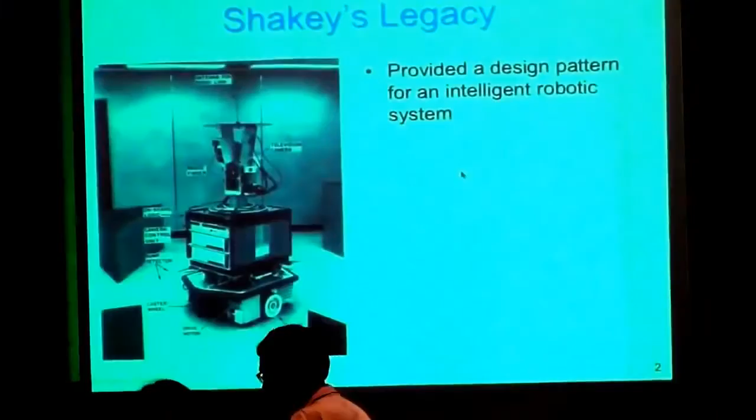In reflecting upon Shakey's legacy, I think the important point is that it provided a design pattern for an intelligent robotic system, a vertically integrated system of subcomponents all the way from motor controllers, sensors, low-level controls, up to the highest level STRIPS-based task reasoning, which was really impressive for the time. This led to a design pattern that has been used ubiquitously in robotics over the last half-century.

What really got me excited about robotics 25 years ago was the idea of search-based artificial intelligence. In 1989, I joined Stanford and started thinking about how we could build computer programs that could compete at the level of humans. Then in 1997, Deep Blue defeated Garry Kasparov. What was interesting to me was that the machines could do planning, reasoning about the consequences of actions. Deep Blue might examine 200 million chessboards per second. That wouldn't be the way a human would solve the problem, but it sure is effective.

So my thought was, how can we build computer programs that enable robots and computers to exploit the skills they're good at and maybe have humans fill in the gaps? A game is very discrete with no uncertainty, but if you think about planning in the real world, complexity suddenly rears up in terms of the models you're using. You have uncertainty both in sensing and in control.

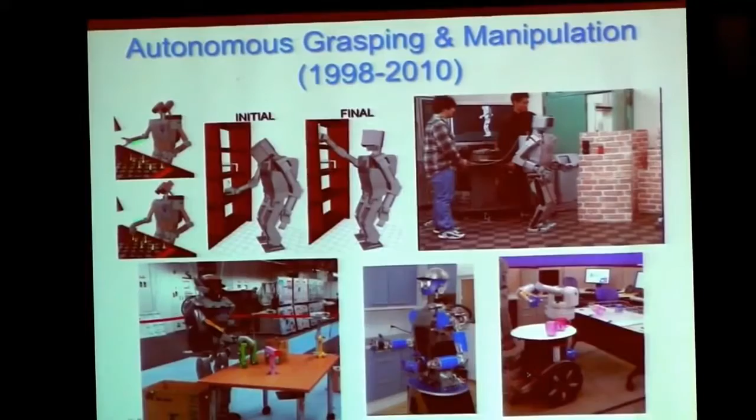I'm going to explain how the planning in the A-star search developed for Shakey influenced a lot of the research my group at CMU got involved with, and things I'm still interested in. I worked with my colleague Steve LaValle to develop a sampling-based planning algorithm called an RRT. The goal was to connect in a high-dimensional space very quickly and find a solution, even if it wasn't optimal, so you could make a planning system that was tractable for higher-dimensional systems.

I'm not sure why the movies are not playing. It's rather unfortunate. Let's see if I just do it this way. I wonder if it works.

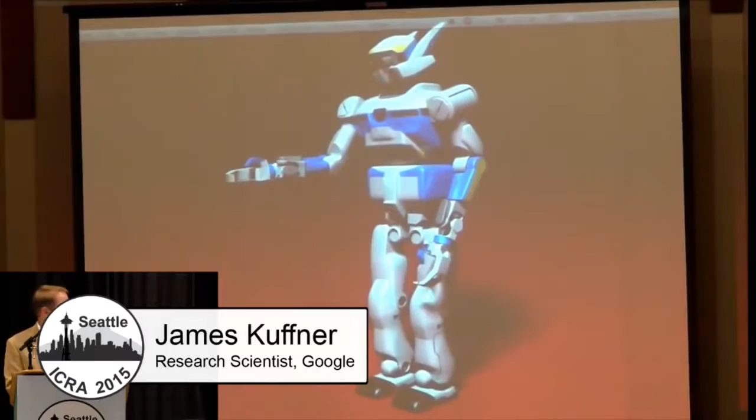Here we go. Okay, sorry.

So one of the trade-offs here was that we wanted to be able to make the common case fast and have a computation that was balanced between exploring a space and rapidly converging on a solution. So that led to this experiment in trying to implement this online on a robot for manipulation.

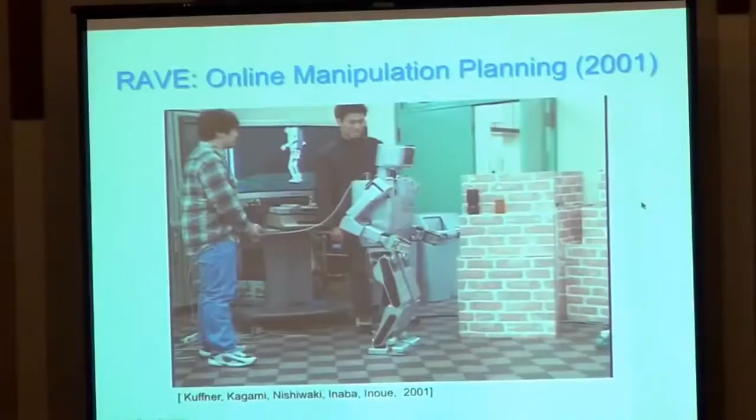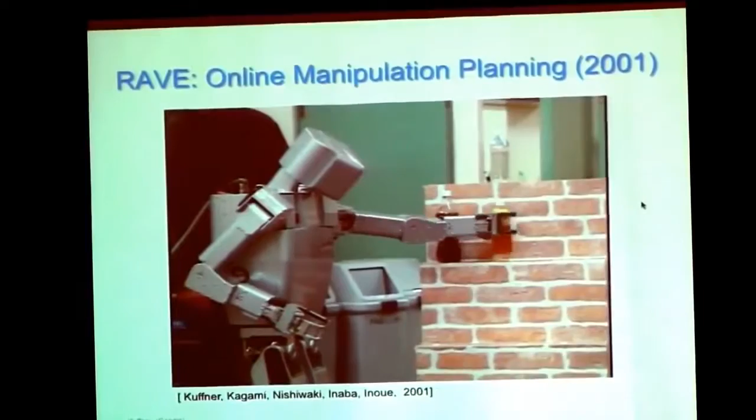So here we have a stereo vision camera in the head. We will compute a path in the 7-dimensional space of the arm to grasp the bottle. That's collision-free, so it computes the grasp, and then it's able to compute another path. And then you have a beverage delivery system that is very expensive.

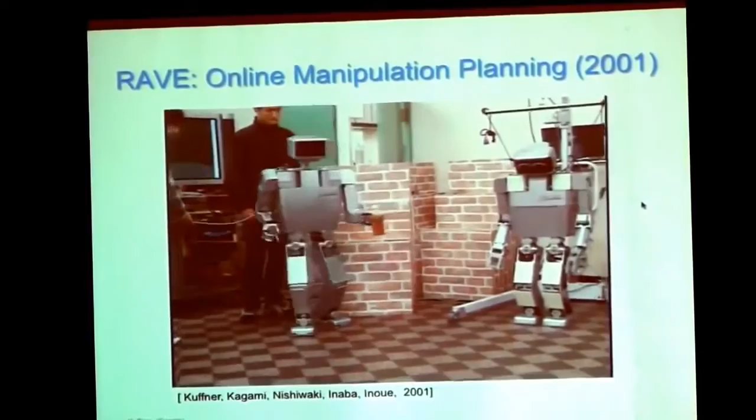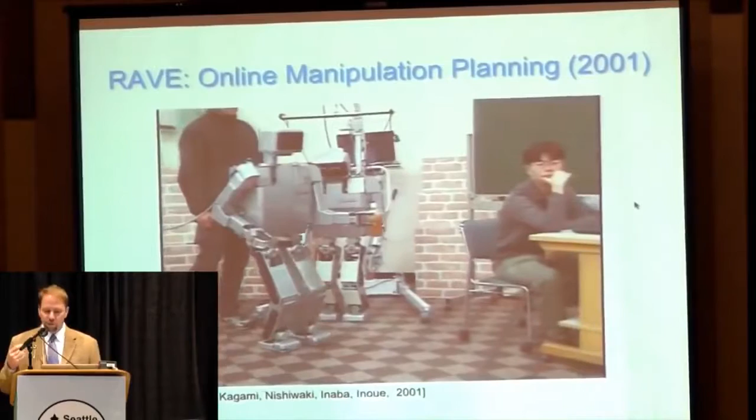Now, of course, this was mostly, in some sense, trying to prove a concept that we could build a system that was adaptive and dynamic, and I think that was in the spirit of Shakey. Shakey was able to not just perform pre-programmed tasks, but actually do dynamic tasks.

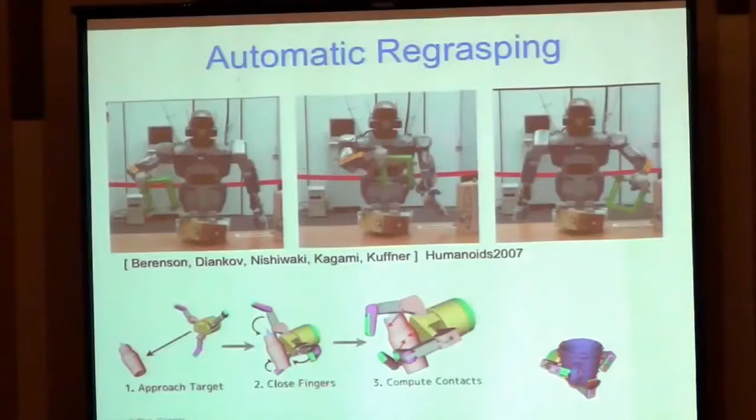So a lot of my students continued on this work, putting in constraints like regrasping, and one of the things that we looked at was how can you actually search in a space to find stable grasps. And this is where I think cloud computing can also help find solutions. You can build these simulations that can run in a distributed manner, and then once you've found stable solutions, you can remember them and then recall them for future use.

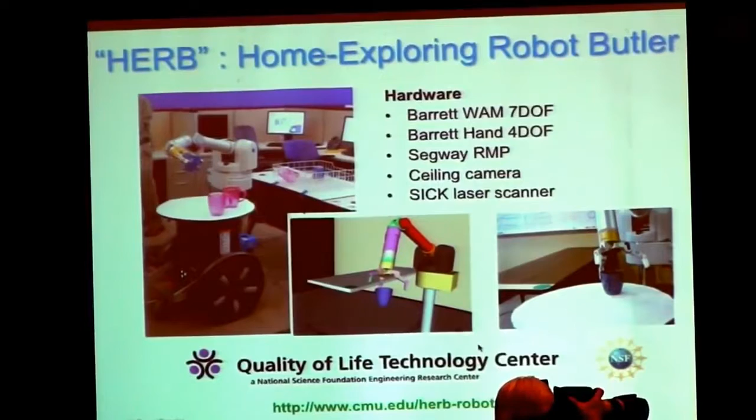So this became integrated, and I would say a Shakey descendant, which we built at Carnegie Mellon's Quality of Life Technology Center, which was called the Home Exploring Robot Butler. It was a WAM arm and a hand on top of a Segway base, and we used a laser scanner to navigate and also to sense obstacles.

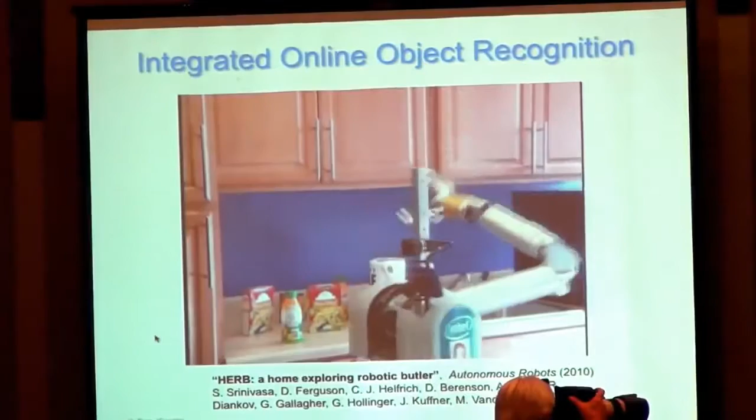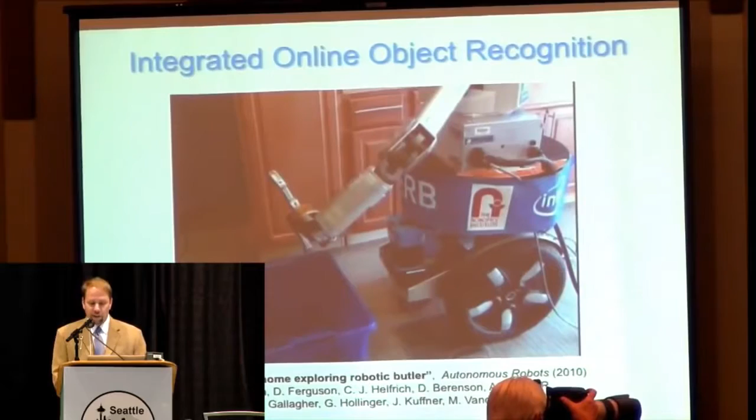We got it to the point where we could integrate a lot of different systems, including recognizing objects, computing a grasp, planning an arm motion path, and then verifying that the task has been completed.

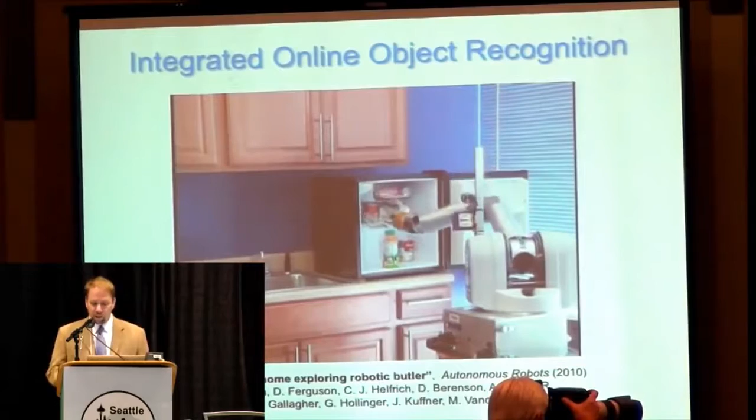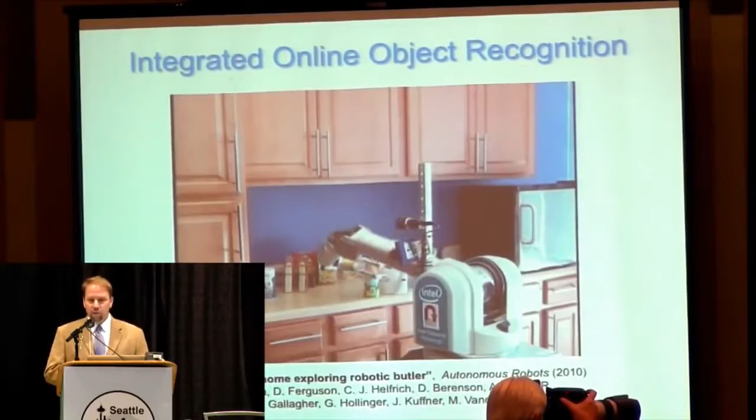And what inspired us was a lot of work that had been done in conferences like ICRA and Humanoids in putting together systems that will scale to many objects, systems that will scale to many situations, and not just have robots in factories playing back pre-programmed motions.

And one of my students, Dmitry Berenson, also looked at planning with constraints, so that way you could look at if you want to keep something vertical, or if you want to respect the fact that you have limited torque and you need to move a heavy weight, how can you do it in an advantageous way?

And my other student, Rosen, his PhD thesis, I think, built on a system that looks much like a lot of the subcomponents of Shakey, in trying to build a series of sub-goals that are generated and then integrated with perception and feedback and planning, and building a kind of robot knowledge base.

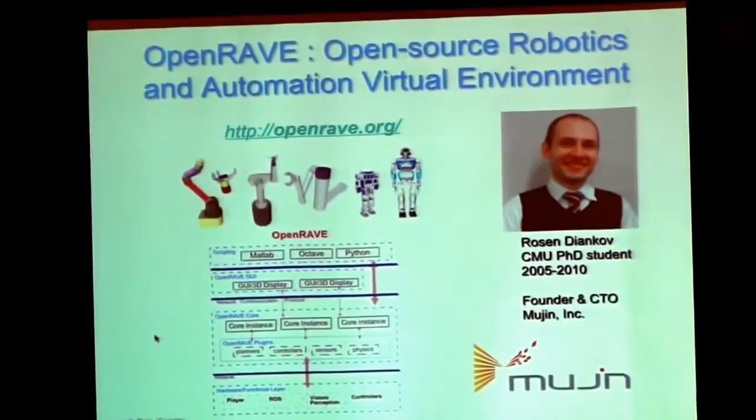By the way, each of these tasks are mostly open source as part of the Open-source Robotics and Automation Virtual Environment, which is a version of the software that I had built when I was a grad student and is now released to the open source community. And Rosen is here today. He founded a company around using this planning technology for automation called Mujin. You should check it out.

So one of the other things that we wanted to do was have manipulation, but we also wanted to have navigation. And searching for navigation in the Shakey world was building a map and then exploring discrete cells. But if you did that in a 2D grid, it would mean that your robot always had to circumvent obstacles. Whereas if you had a legged robot, you could actually step over or step on obstacles if you needed to.

And so the thinking was to try and figure out a search-based framework for doing navigation for legged robots, so we came up with this concept of footstep planning, and Joel Chestnutt, one of my first PhD students, who now works at Boston Dynamics, developed this technique.

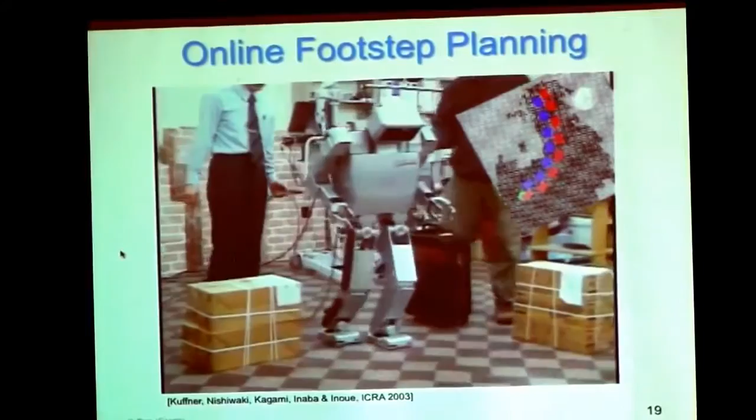And this is sort of one of the first videos that we built with our colleagues at the University of Tokyo, at Professor Inoue and Inaba's lab, where we had onboard stereo vision. We would build a map, we would plan a path towards the goal. In this case, it would detect the red ball, and then it would plan online a sequence of footsteps to navigate to the goal.

And this first version of the footstep planner could examine a few thousand footstep candidates in about 3 seconds. But very soon we were able to upgrade the computers, and the joke in motion planning is that you can republish your research 10 years later with the title Real Time. Just let Moore's Law do all the hard work.

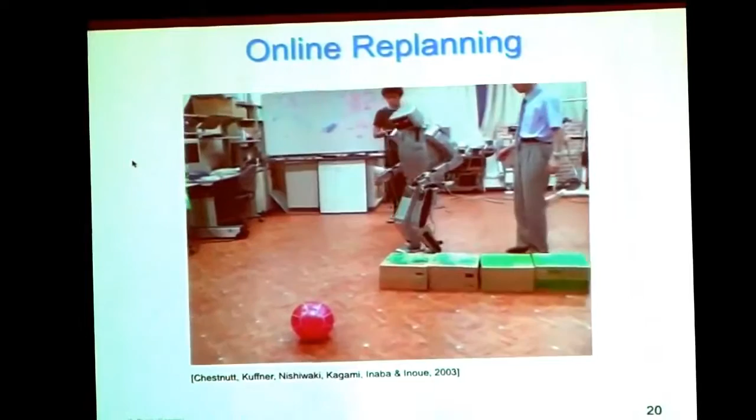But this is actually replanning from scratch every footstep cycle. This is a 1,000 millisecond step cycle, and it's able to replan from scratch where it is.

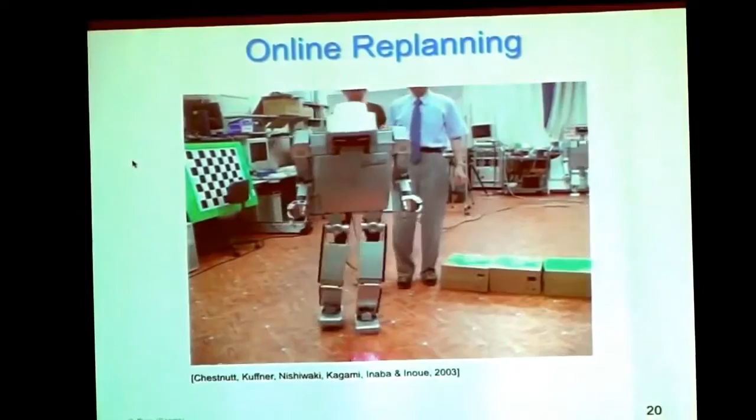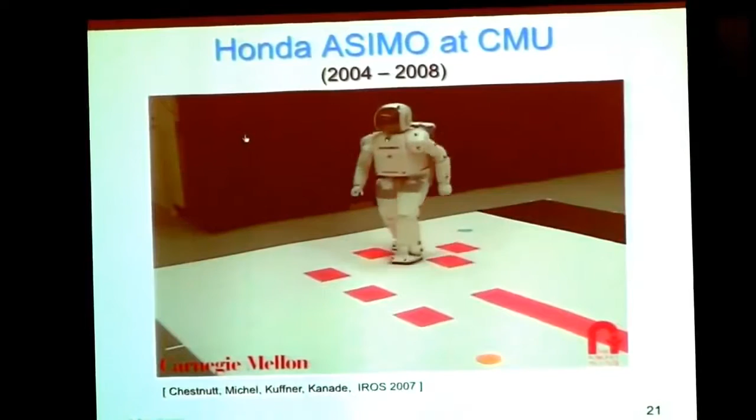So when there's small uncertainties in the execution, it's able to replan. That culminated into what we call ASIMO and the Pink Blades of Doom, which was an experiment we conducted at Carnegie Mellon, several of my students. And the goal was initially, since we didn't have access to the controls of the Honda controllers, but we could observe that it was deterministic, and we could build essentially a motion map for how to control it and how to move it, we were able to basically run this planner.

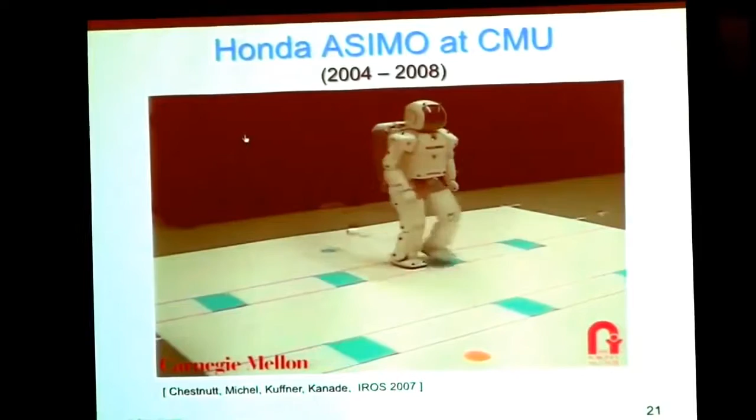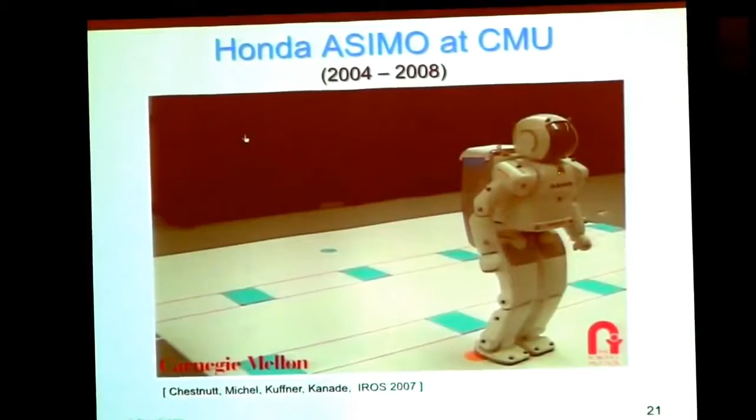This has an 800 millisecond cycle, and it can also plan in both space and time. So if you have predictable motions, we could have online tracking of the obstacles. We called this ASIMO Plays Frogger. This shows an example of the online search, and by this time we're searching upwards of 10,000 states in one step cycle. And there's my student Joel.

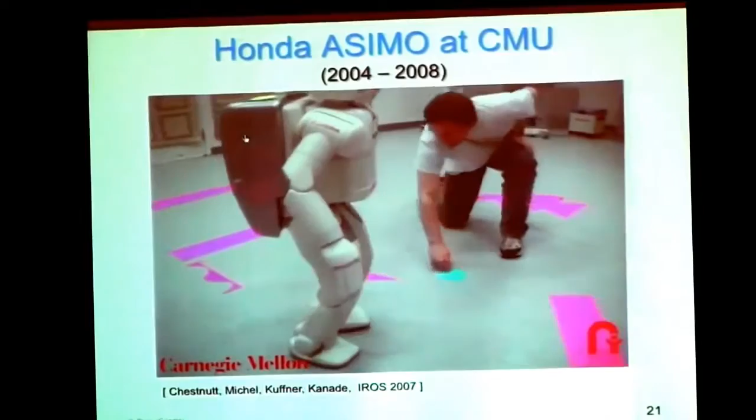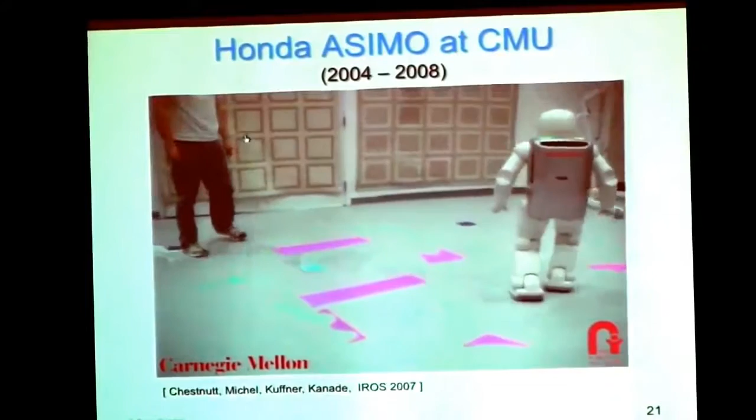He's able to have the goal location moved around in real time. The robot's tracking it, and it's constantly replanning and trying to avoid stepping on the red areas. And the poor robot just keeps getting tortured.

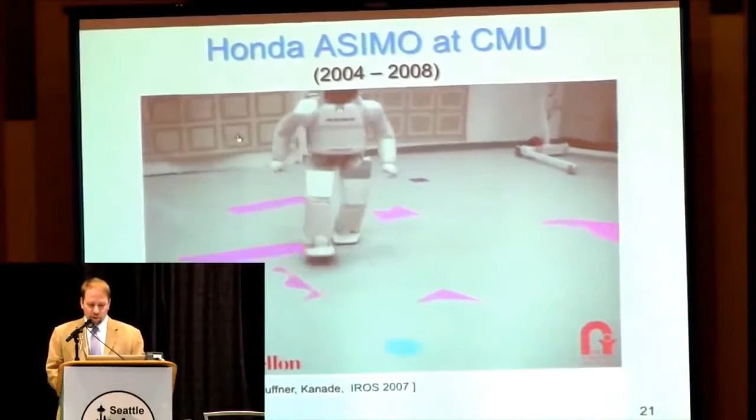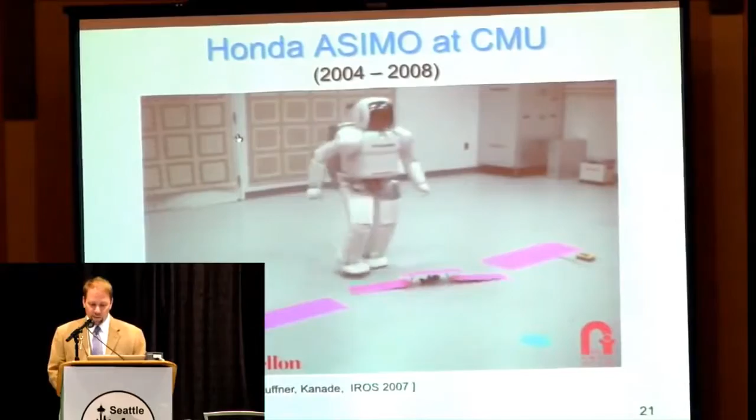Now, what's interesting is that we were able to deploy this on several different robots. It's the same planning framework, similar to A-star search. Here, we're actually estimating in real time the rotational velocity as well as the position, so that we can plan in space and time. So this would be like the robot trying to go through a revolving door.

And so this is actually what the robot sees, in this case, in off-board perception. We're able to track and estimate. And because we can estimate where the future positions of the obstacles are, of course, we can build this plan. This is actually pretty tough for a human to do. I remember trying to do it myself and stepping on it many times.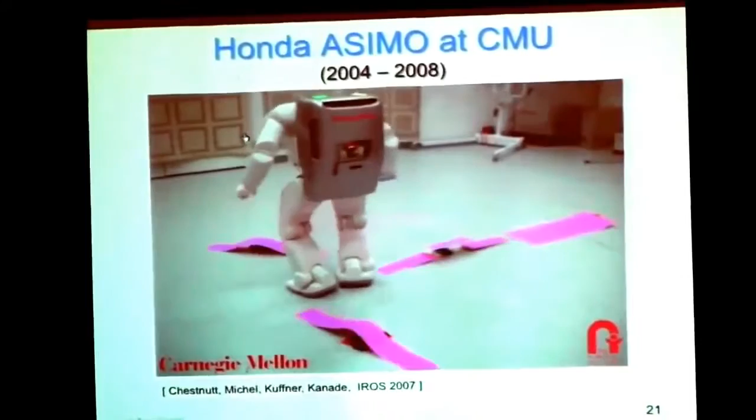This was deployed on other robots, and I just wanted to point out this is Joel working at AIST lab in Tokyo, in Odaiba, and we built a virtual reality interface to control the robot so that you can actually see overlaid on the real world the plan that the robot has actually computed. So you can see he just drew a path on the world saying, I'd like the robot to go here.

The heuristic is modified to try and stay as close as possible to the plan, but then you can sort of see in real time the robot providing feedback as to what it's actually planning to do and then executing, and it replans from its current position as it gets to the goal. And you can see actually what it looks like from the operator view. I think that with the new research in virtual reality and augmented reality, this could be some very compelling user interfaces.

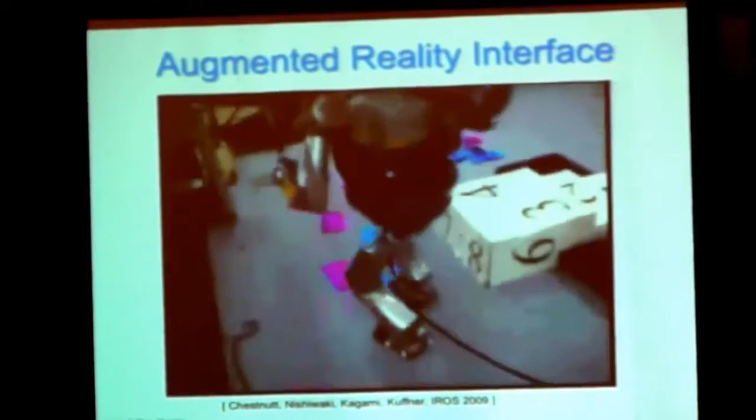Here it's actually stepping up on an obstacle. I kind of like this interface because when you have full autonomy on a robot, it'll surprise you if it does something unexpected. And so here you actually get a little preview of what it's planning to do, and you can actually stop it or have it replan if you don't like the plan that it's chosen.

I have another student, Mike Stilman, who unfortunately passed away last year, but he actually looked probably at levels of planning that were most similar to Shakey. He looked at manipulation and also navigation among movable obstacles. And the idea was if the robot has a navigation goal that is currently obstructed, can it actually proactively move objects out of the way in order to clear a path? And so the object becomes something that's movable.

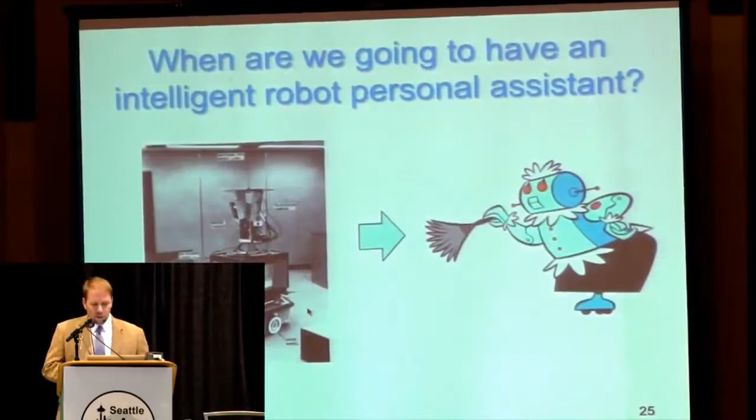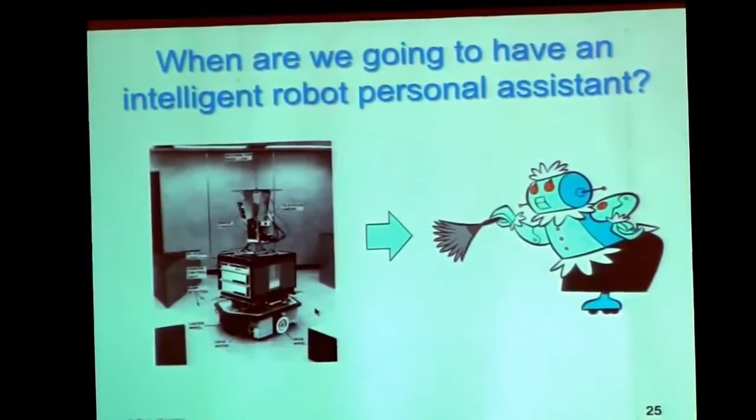So we learned a lot of things during that research, and one of the things that I kept scratching my head about after all of this hard work was, when are we going to have an intelligent robot personal assistant? And I tried to think hard about what was it that is so hard and why after half a century we still don't have what we had hoped Shakey would result in, and that is some intelligent robot we could buy right now.

And I like to call it a research challenge snowball, and I think it actually comes from the unstructured environments. So because we have unstructured environments, we have unknown objects, unknown obstacles, it means that we have to use online perception. And that means we can't really cheat with a priori models when you have unstructured environments.

That also means because you have to do online perception and things may move around in the world, you can't use predefined trajectories. So that means you have to have online motion computation. And finally, you might have dynamic tasking because you can't rely on predefined sequences in all cases. And you may need to restart if one task fails or recompute a task plan.

So because you have to build all of these things and solve all of these problems, I think it has been very, very hard. And these problems still exist, but what I'd like to argue is that we are now poised, I believe, to start solving many of these problems.

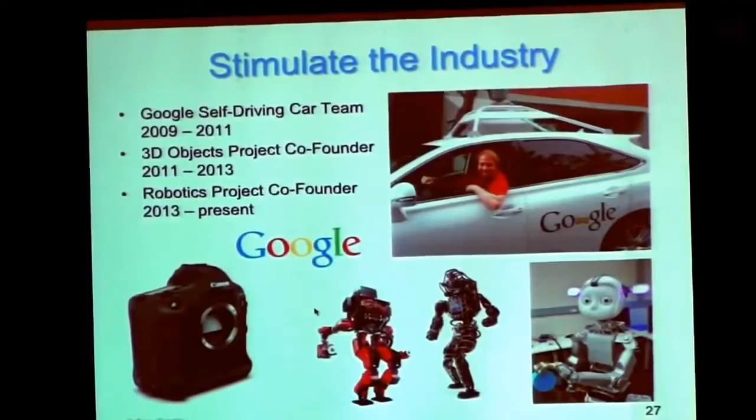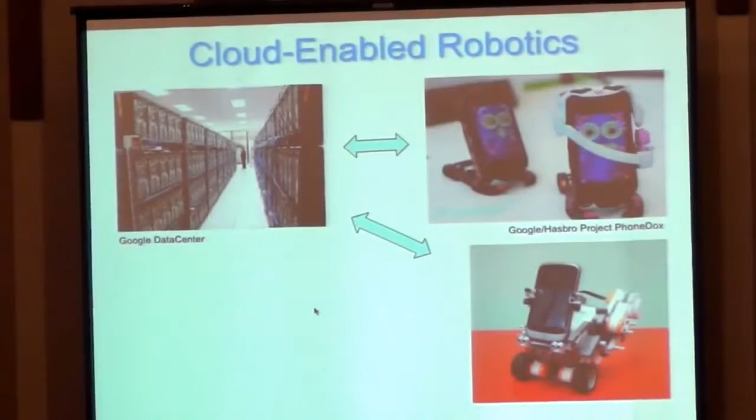And I left academia and in 2009 felt that, okay, I'm going to try and stimulate the industry. I joined the Google self-driving car team, and I founded a project involved with 3D scanning at Google, and then founded the Robotics project. And one of the things that was exciting to me at the time was thinking about what would change for a planning system if you had suddenly a massive distributed computation available as a resource.

So back in 2011, we built a library and open sourced it so that you could turn any Android phone into a little robot. So every Android phone since Froyo, you can plug in a USB board, and then you're able to control cameras. You can have motors. You can basically build your own cellbot. Some of my colleagues at Google also created a native implementation of ROS on Android that they also open sourced.

And what was interesting to me was that people were turning over cell phones at about an 18-month clip. So that means every 18 months, people were basically handing a supercomputer to their kids because they didn't know what to do with their old phone, or they were selling it on eBay for 10 bucks. And so the thought was, well, wow, you could actually build a robot out of this because it has most of the things that a robot wants, like GPS, like an accelerometer, like 2 cameras, like a microphone, like a big screen, like a battery, like a GPU, like CPU, memory. All these things it already has, Wi-Fi, Bluetooth, 3G.

So the thought was, can we use all these old recycled phones to make a whole bunch of robots that are cost effective. And I think what's enabling is actually wireless networking. I mean, a lot of people talk about Moore's Law as being a revolution in computation, but if you look at peak mobile broadband speed growth in the last 10 years, it's a 1,600 factor. Nobody would believe 10 years ago that you would be able to stream HD video from YouTube to your phone and that everybody could do that all at the same time.

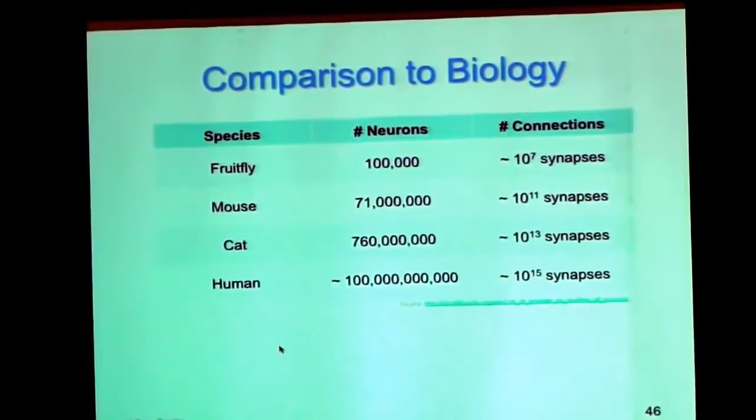So compared to biology, we've actually got an estimate that there's 100 billion neurons in the human brain with 10 to the 15, that's a quadrillion synapses. And I believe that we can reach that amount of storage now using a distributed computer. And you can see how that compares to other animals. So now let's say even a desktop PC with 64 gigabytes of RAM, depending upon how you cleverly encode the connections, you might be able to actually store a net of that size. So maybe not quite a mouse, but maybe approaching the intelligence of a mouse even on your desktop.

Finally, I think these grand challenges are very exciting. There's a lot of interest and enthusiasm around the Amazon Challenge and the DARPA Robotics Challenge, which will be held in California next month. And these are all very great. I think we should have more of those. I think that definitely stimulated many of us to work on self-driving cars with the Urban Challenge, and these things get the general public also excited about the potential for this technology.

So if we think about rebooting Shakey in an era of cloud-enabled computing, I think with vertically integrated systems, the time is ripe to reconnect AI task planning and motor control. That was something that the Shakey project did really well and admirably for the time. Now we have so much more computing resources, we should be able to do much more exciting things and have robots that truly can react in a dynamic way to tasks.

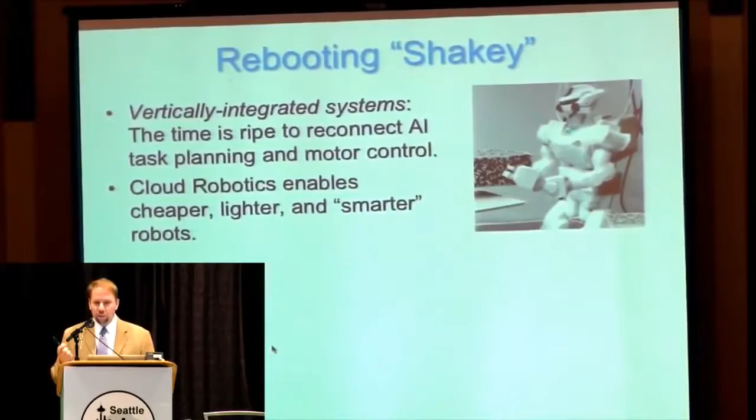I believe that cloud robotics enables cheaper, lighter, and smarter robots. We can offload a lot of the heavy compute and a lot of the data storage to the cloud, and then have enough local computing client side to keep the robot safe and functional. So the way I like to say it is, it's much like your phone. When your phone doesn't have a data connection, you can still use it, it's just not as useful. And that's the way I view a cloud-connected robot.